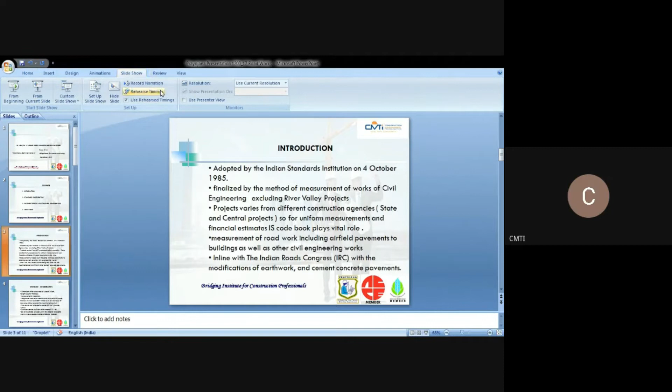So basically, it was adopted. Can you start the slideshow? Go to the slideshow tab. The top. Yeah, from beginning. From beginning. Okay. Far left. Yes, that's the one. Visible, right? Yeah, visible.

So basically, sir, in this introduction part, it was adopted by the Indian Standards Institution on 4th October 1985. In this, they finalized the method of measurement of civil engineering works, excluding River Valley projects. The third point says that projects vary: private, state, and central projects all vary. So for uniform measurement and financial estimates, the IS book plays a very important role. So we are using this.

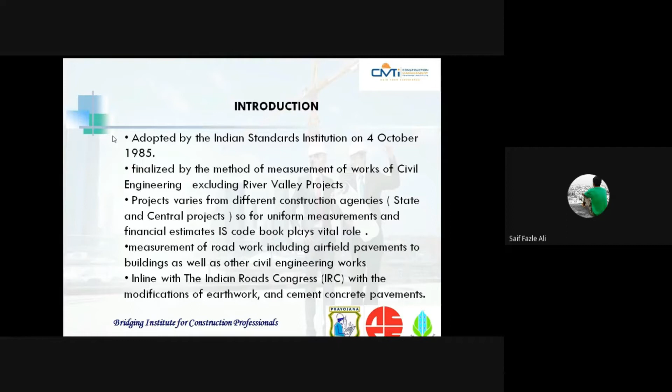This is in line with the Indian Roads Congress, the IRC. The modifications of earthwork, cement and concrete are also there. So, what are the standard considerations? Like in other code books, the dimensions will be length, width, and height in sequence. Measurement is in decimals only, length and width measured to the nearest 0.01 meter and thickness to 0.05, which is less because of the tolerance. Similarly, areas and cubic contents are measured to the nearest 0.01 cubic meter.

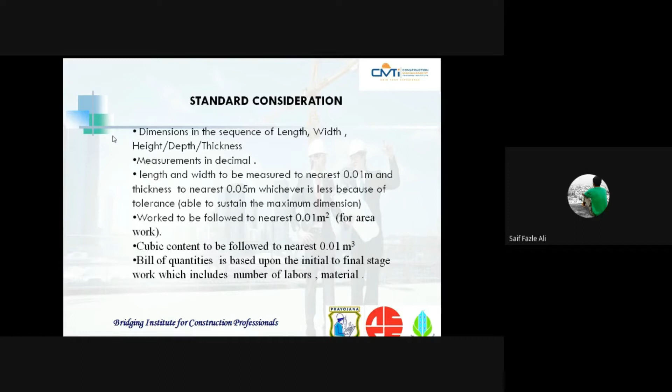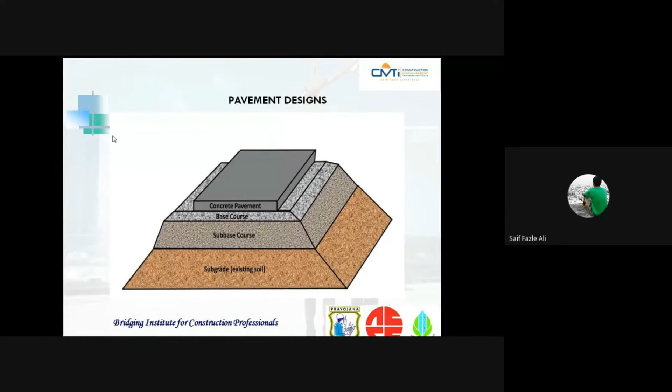Now the BOQ plays a very important role whenever we start and end the work. It includes the number of laborers and the materials which are going to be used. So initially and at the end we have to check whether the BOQ is matching or not. Slight variation will be fine. Now this is a diagram, sir. The lowest part is the subgrade, then in sequence the sub base course, then the concrete pavement.

Now coming to what standards should be considered in pavement design. Levelling should be done at the beginning and after the construction of the pavement. So at the beginning and at the end, we will do the levelling. It is done at 5 meters center to center in the longitudinal direction, and on a grid. The grid is a square-like structure. That is the grid.

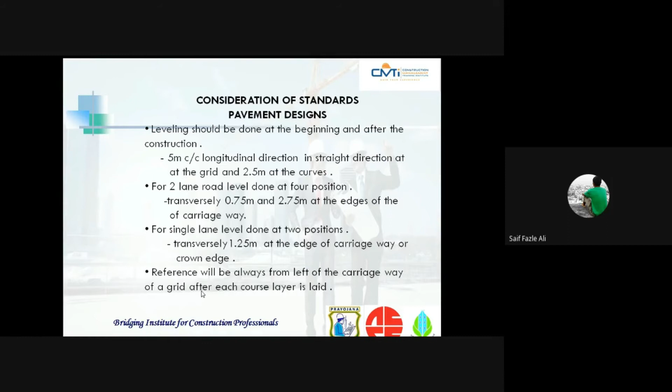Okay, reference will always be from the left of the carriageway of a grid after each course layer is laid. Okay, sir. So this is the diagram, sir, that I have taken. This part is the transverse joint, and this part is the longitudinal joint. So now, these dowel bars.

One minute, sir. Are you able to see the slide, sir? Yeah, yeah, I can see.

Yes, sir. These dowel bars are used for transferring the load, sir, at the transverse joints. So this is the slab. This is for the slab thickness, what we can see in this part.

Are you able to see the cursor? Yeah, yeah, I can see. Yes, yes, you can go ahead.

Yes, sir. For this only we are using the dowel bars, and tie bars are used for the face of the slab. Okay, sir. Everyone is able to see the cursor. This is the face. And crown, what is this? The topmost part is what we call the crown.

Now I'll explain what the carriageway is also. When you take a pavement, the lane which it is following, you can say this is the carriageway, in this direction or this direction. That we can say is the carriageway.

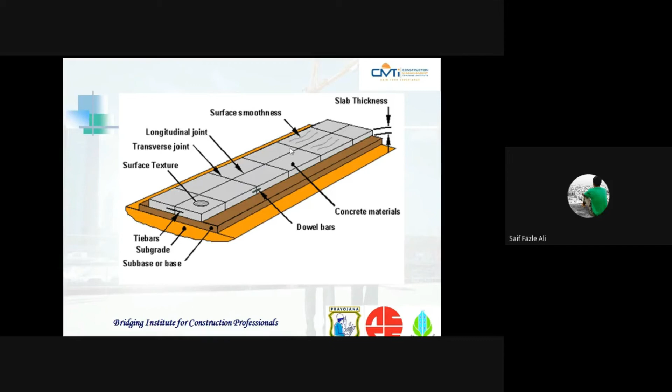And shoulders, these are the shoulders. When you see in the villages, the space left at the end of the pavement on both sides, one this side and another this side, is the shoulder. And in the cities, pedestrian paths are made on that, in the city projects.

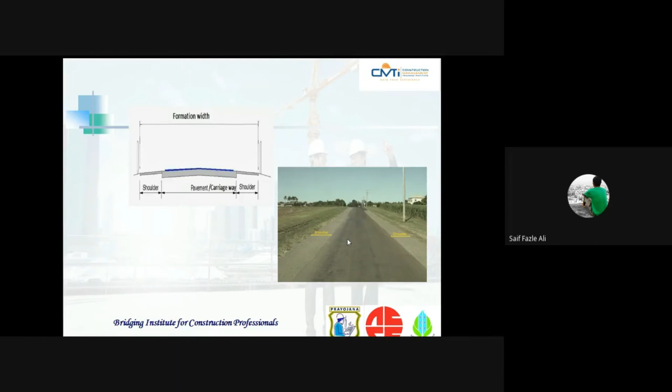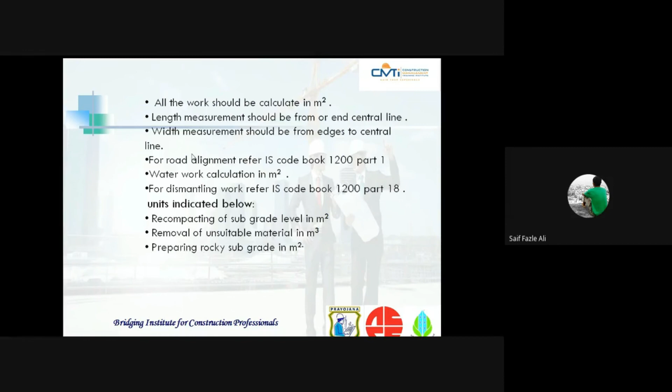And how to tell the difference? Sorry, tar has a dark brown color. Both have a dark brown color, but the difference is that bitumen also has a black color, a dark black color.

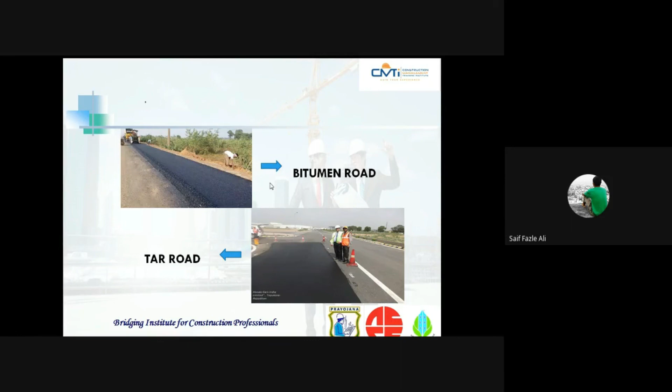And to conclude, the standard IS 1200 Part 17 covers the method of measurement of road work, including airfield pavements. For airfield pavements, you can see the airport runways; that is the best example of airfield pavements.